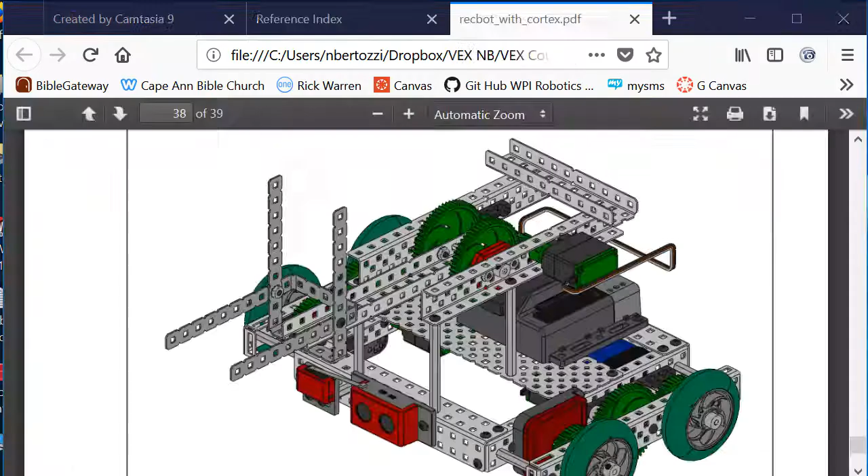If you have the thumb drive for the VEX course, as discussed in an earlier video, go to the index here, click on reference, then you have RecBot building instructions, and open that up.

Scroll down to just about the bottom there. You'll see a picture of the arm we're going to build, except it's not going to have these pieces at the end to hold something. So we'll build it without the motor or the encoder, but we'll build pretty much most of what you see there.

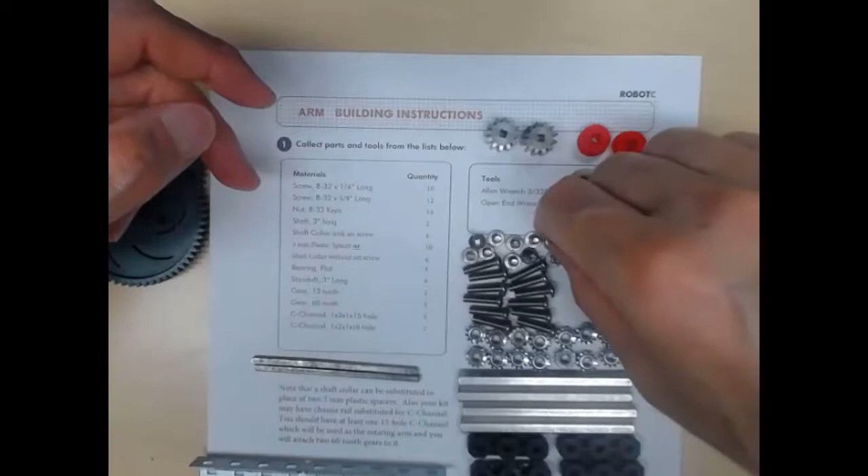The first thing you want to do is organize all your parts. You can see you have a materials list here. First is the 832 by 1/4 inch long screws. VEX pretty much uses the English system. 832: 8 is the size, which has to do with the diameter. 632 is a smaller screw, for instance. 32 means 32 threads per inch, and 1/4 inch is how long it is.

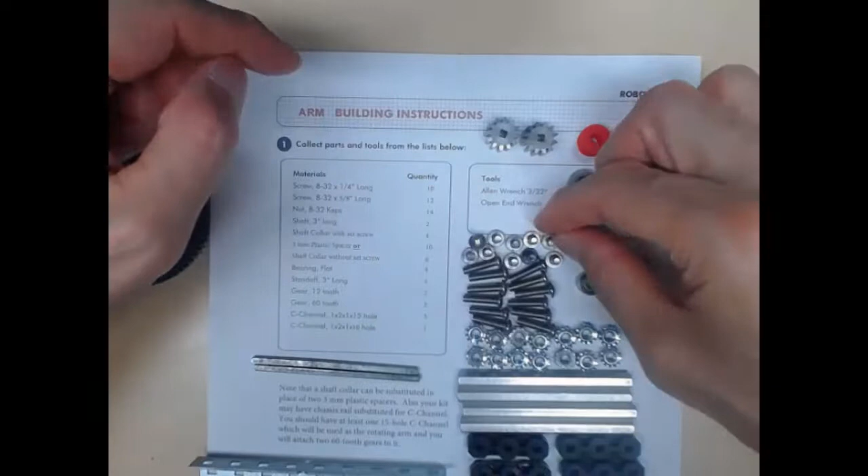You have 10 of these 832 by 1/4 inch long, and 12 of the 832 by 5/8 long. You have 14 of these nuts, and you put the nut on so that it goes up against the part, and this little star piece keeps the nut from loosening up.

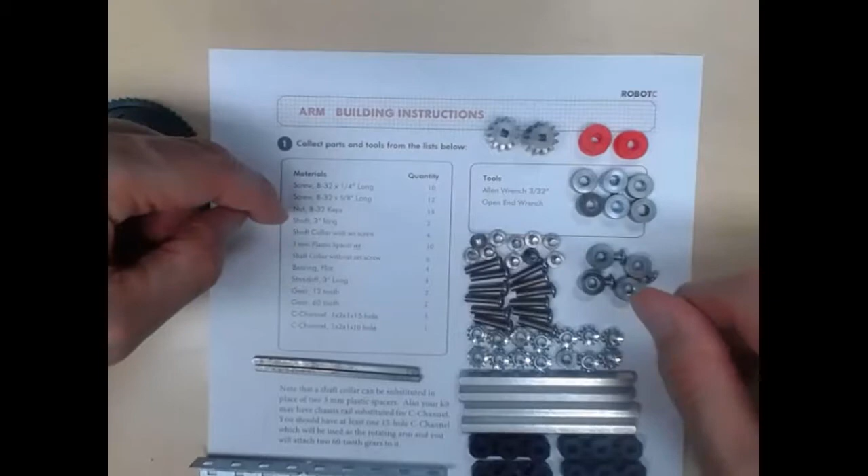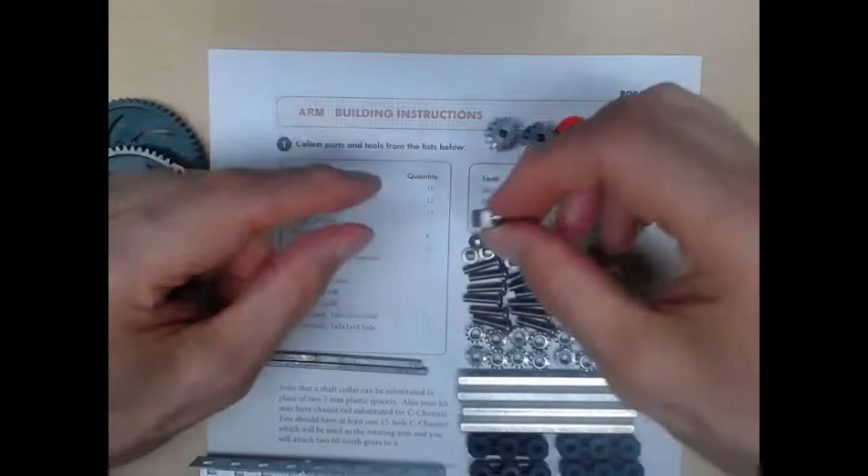You should have 2 3-inch long shafts and shaft collars with set screws. You should have 4 of those. You should have either 10 of these 3mm plastic 3D printed spacers, which are just about the same width as a collar, or you may have 6 shaft collars without set screws. Let's see, I think I had one.

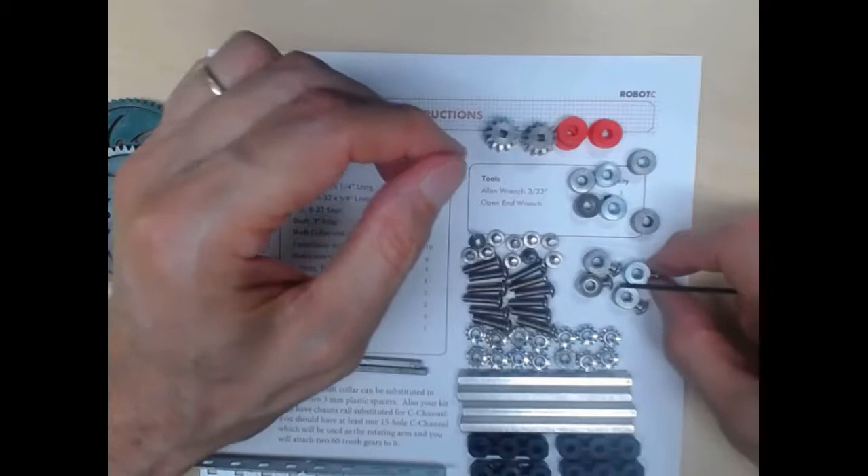This one still has the set screw in it - just a little screw - and you can tighten it up with an Allen wrench on the shaft, but it's very narrow so it doesn't interfere with anything. We gave you 4 of the collars with these 832 1/4 inch screws, just so the same size Allen wrench fits everything, since you'd otherwise need a smaller Allen wrench for the collars. Unfortunately, the head on this screw is wide enough that when we put it together, in one case it actually interferes with the bearing, so we probably should have given you just the ones with the set screws.

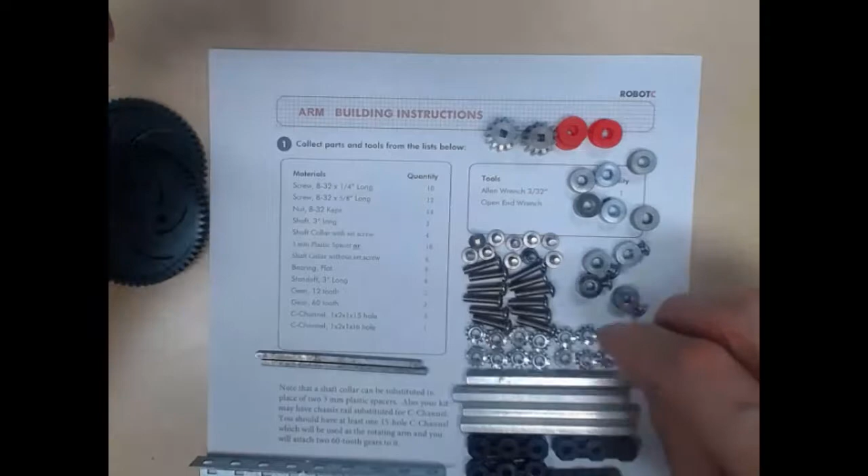So those are the collars, and then the bearings are these black ones with 3 holes in them - those are Delrin bearings. These are the standoffs, threaded at either end - those are 3-inch standoffs. You have 2 12-tooth gears, and 2 60-tooth gears.

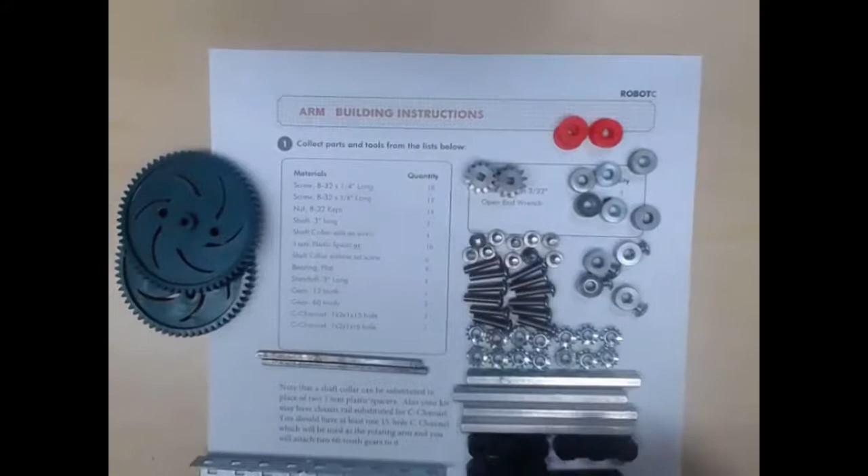For the C channel, you should have 3 pieces that VEX calls 1 by 2 by 1s, with 15 holes - you can count 1,2,3,4,5, plus 10, another 5 is 10, and 5 is 15. You should have 3 like that, and then one like this with 10 holes.

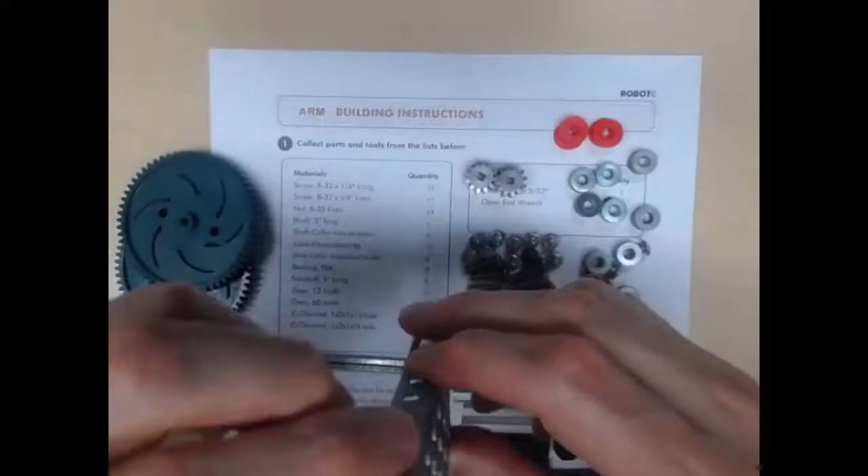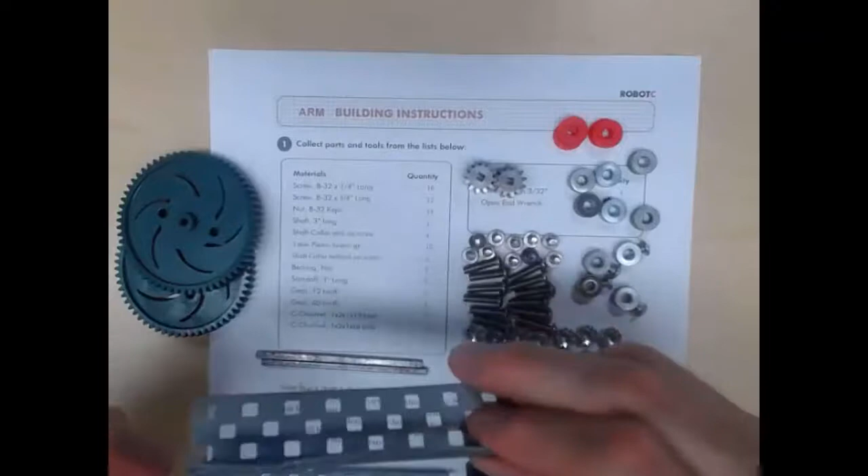Now you may have something that looks like this - an L shape. As indicated in the text, these are called chassis rails, so you can still use them. They're pretty much the same, except they don't have this end - they're missing a side. So to build this arm, we can use either C channel or these chassis rails.

Make sure that every team has at least one of these 15-hole C channels, because this is going to be the arm. We're going to mount a gear on either side of this, so make sure each team has at least one of these C channels.

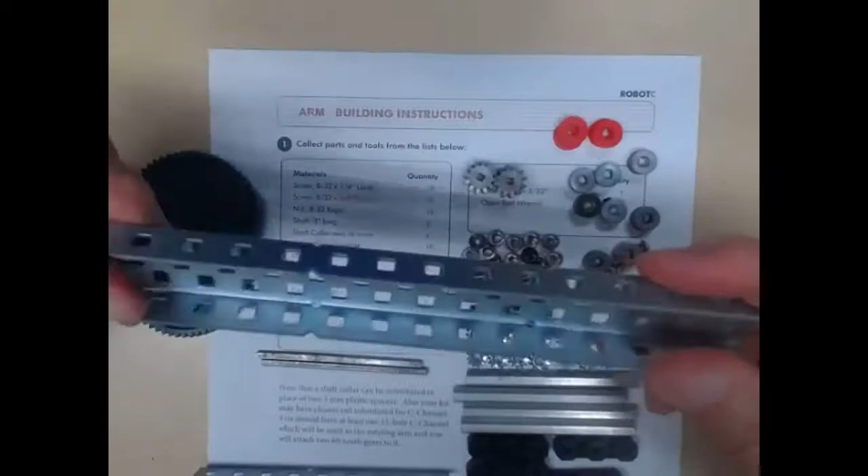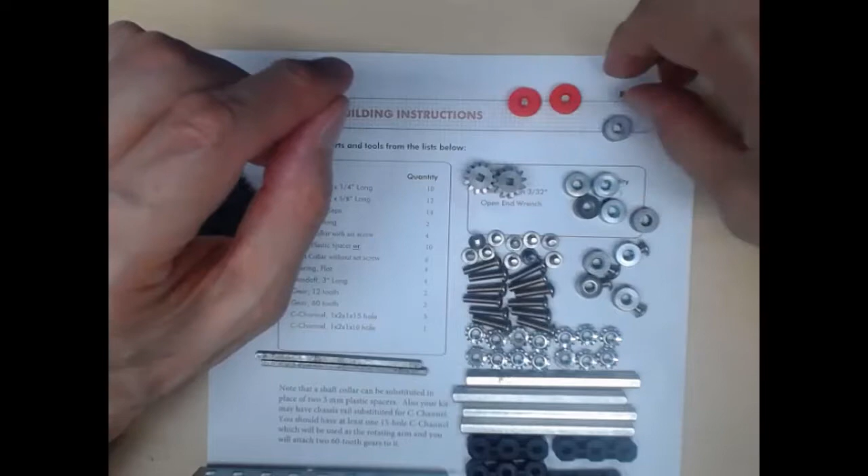Earlier I said the 3mm spacers were the same thickness as the collar - what I meant was that 2 of the 3mm 3D printed spacers is about the same as the collar. We wanted to send you enough spacers; normally you don't want to use a collar as a spacer, but since we're starting school, we didn't have enough spacers to send along.

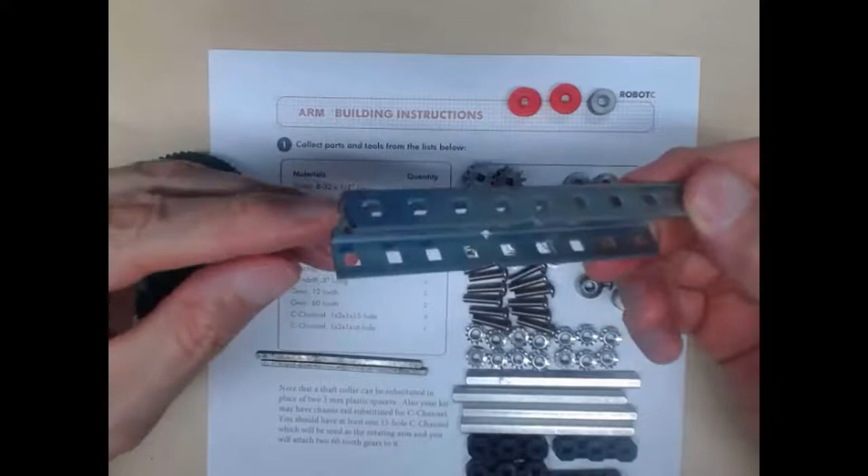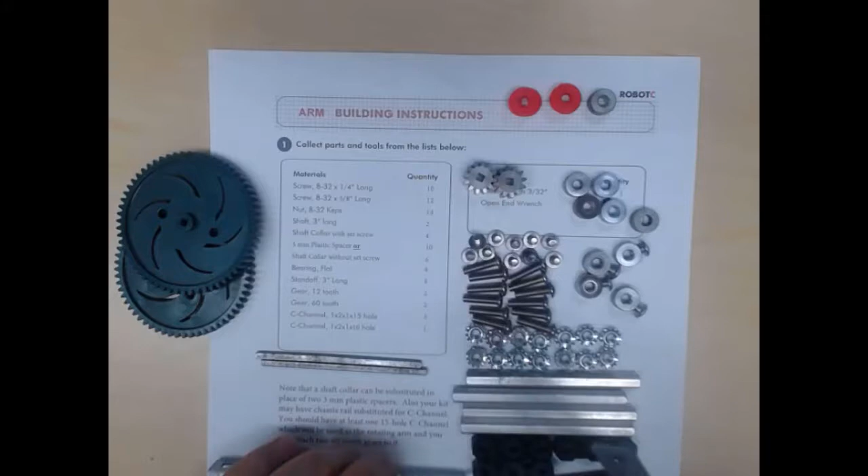Also, I said you want a 10-hole piece, but this piece I have right here actually has 9 on the side - it was cut, and that still will be okay, since it's the distance from here to here. I'll show you how to do that when we get to it. But anyway, if you have all your parts, the first thing we're going to do is build the arm. Let me just move some of this stuff out of the way.

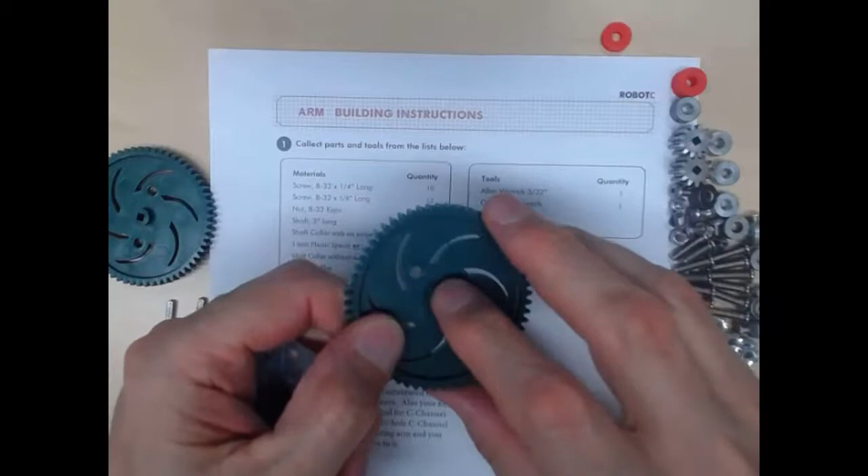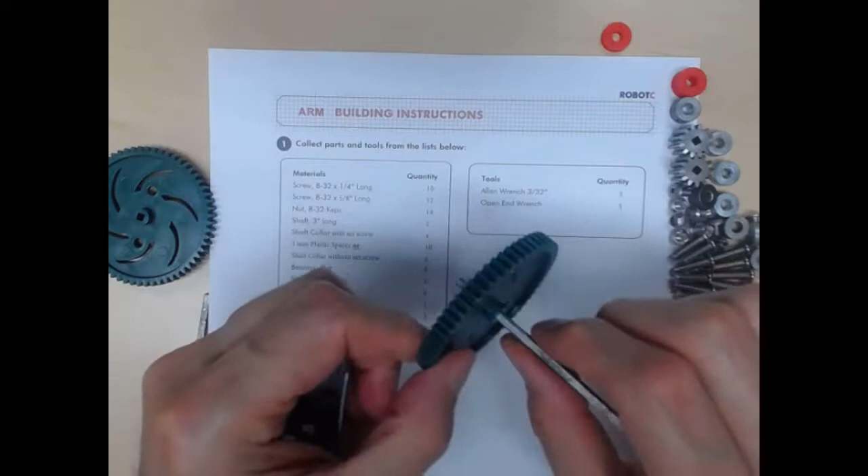Okay, so we're going to put a gear on either side, and you can see that if we were just to bolt this, there's 2 holes here. You want to put a bolt through this hole and into this end hole. But you can see that because of the width of the axle here, with a square, we want to be a little bit wider. The wider that is, then the force being exerted on the axle will be reduced, right?

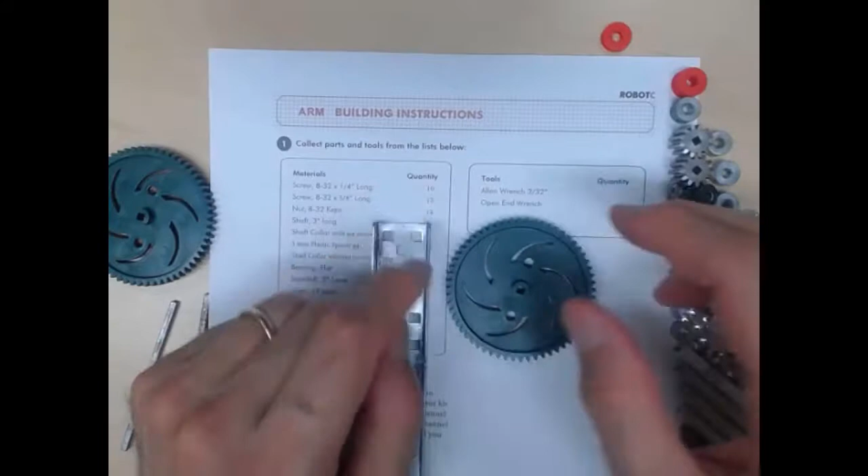So that's why what we want to do is put a bolt through that hole, and then take one of the collars without the set screws. It might be a little hard, you might have a little trouble pushing that on. Just push that on, and now you can see this is going to be offset, so that when we tighten it up, it's not going to push on the hub and warp the gear. So you can just go ahead and put that on there.

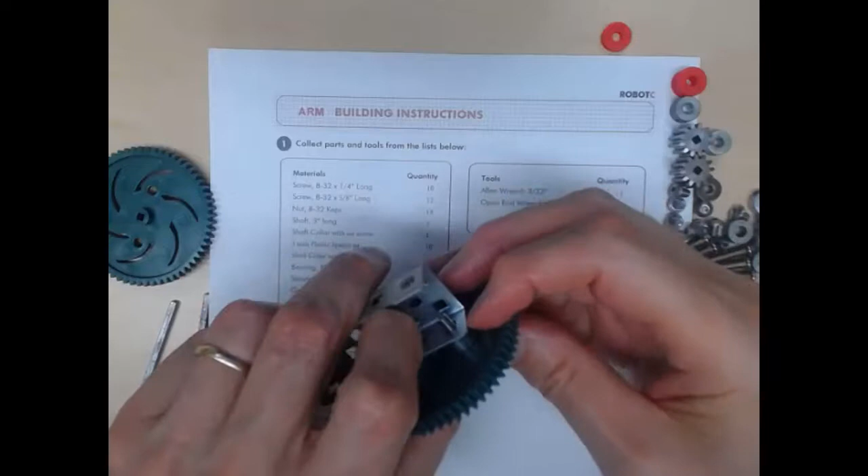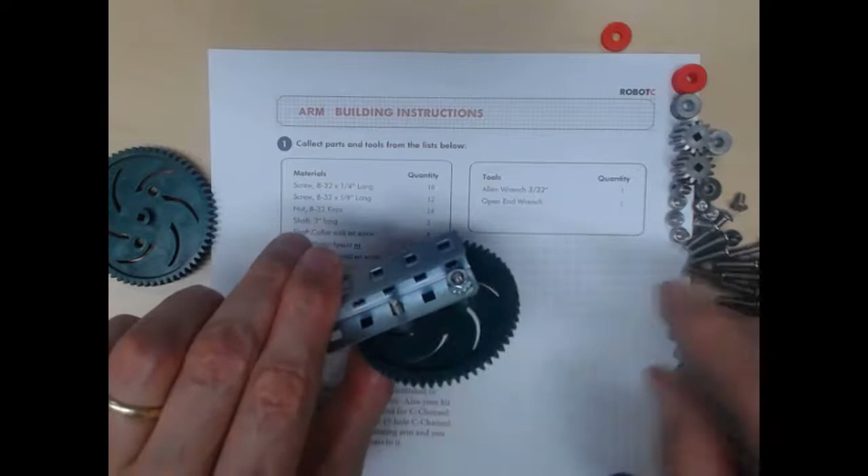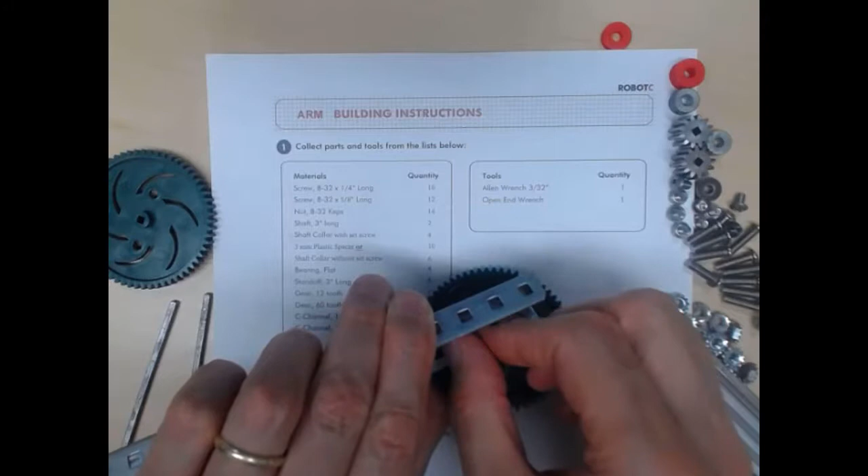Okay, and then you'll do the same thing on the other side. Take a collar without a set screw, and you can get this ready. Put that through, and then come through on that side. And don't tighten them up too much, just finger tight for now. And then you'll do exactly the same thing on the other side.

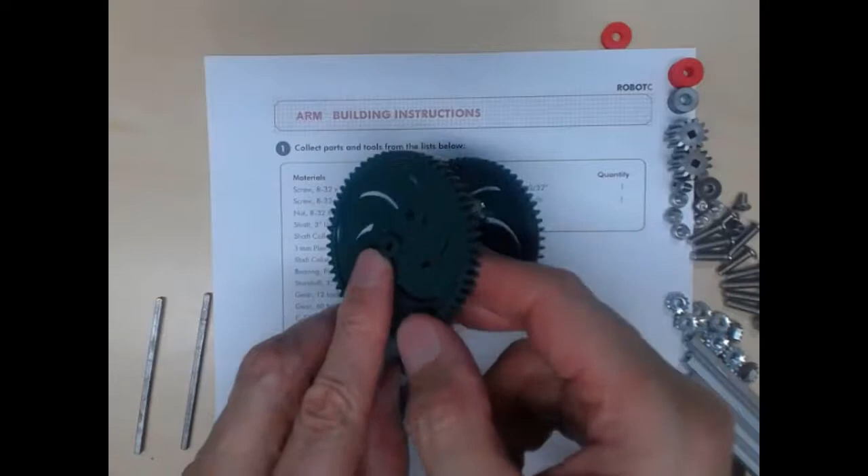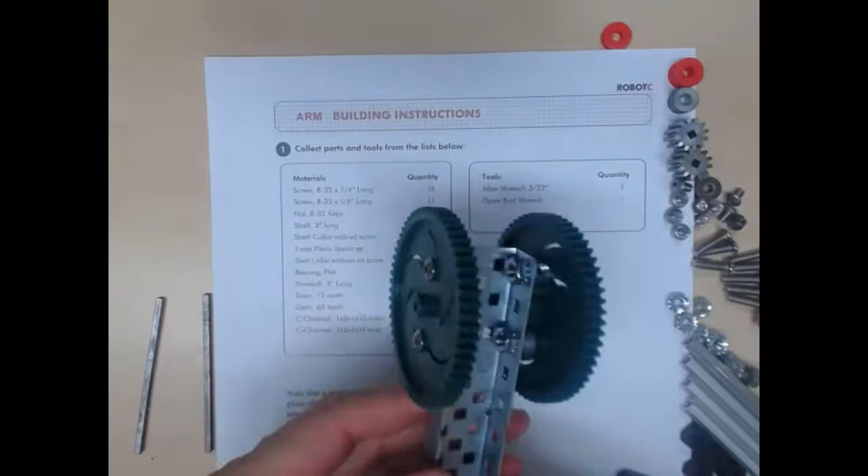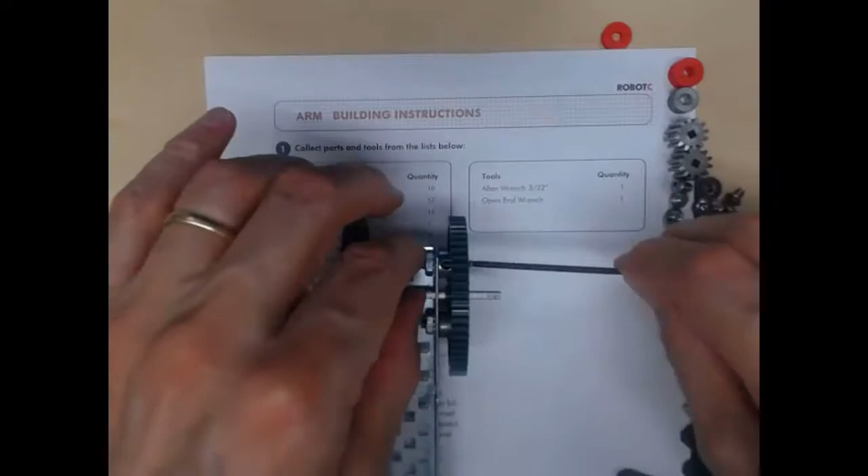Okay, and then just put a screw on the other side and a collar. And while that's loose, we're going to put the axle through. Since it's a little bit loose, you might have to just jiggle it a little bit and get the axle through so it's about the same distance through on both sides. And then you can take your Allen wrench and just snug up the 4 screws. You can just hold the nut with your finger and just snug that up a little bit, it doesn't have to be super tight.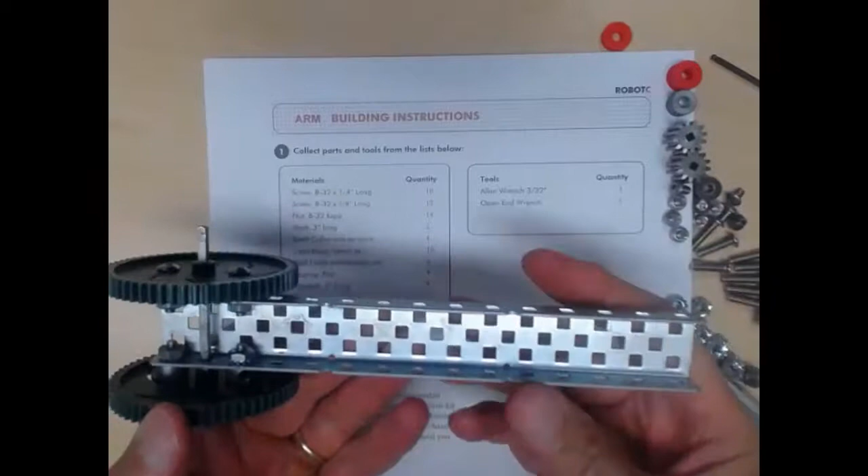So now you have the arm, okay, and you have 2 gears on spacers attached to the arm with an axle.

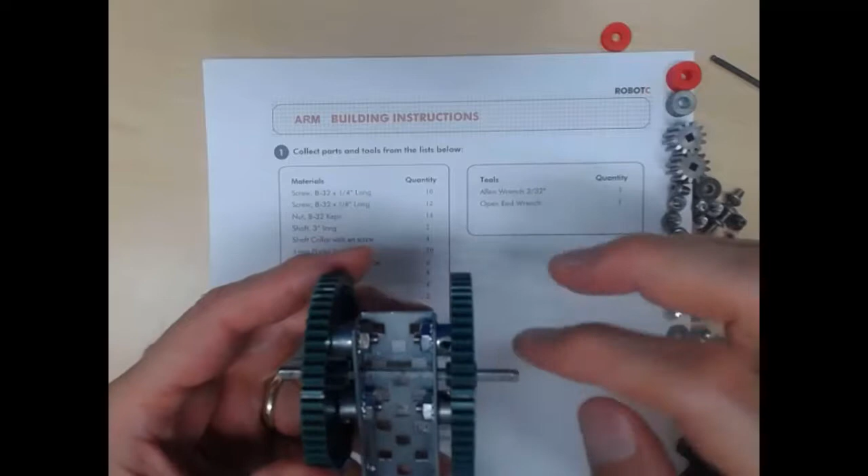All right, so we have the arm with the spacers, and I think earlier in the video I said that by having a wider hub, it reduced the force on the corners. It doesn't reduce the force - the force is spread out over a larger area, so it reduces the stress. So I just wanted to be clear that making the hub wider doesn't reduce the torque, but it does reduce the stress on the material.

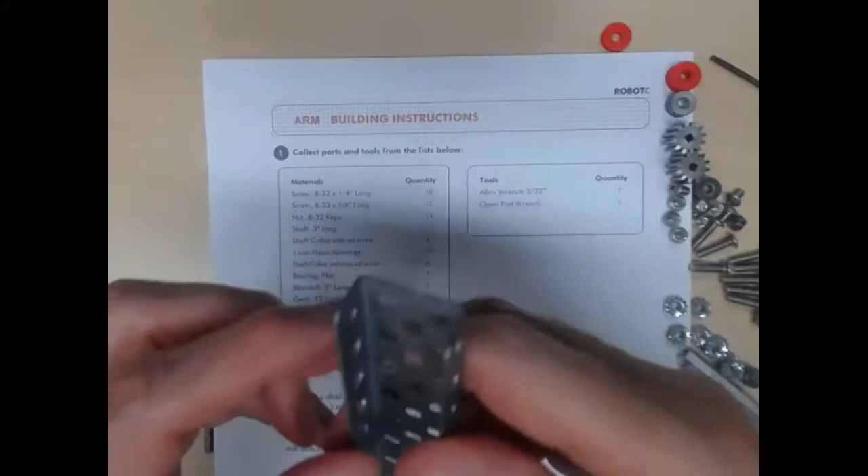So the next thing we want to do is prepare the side rails. So now you want to take, if you have another C channel, the 5-hole C channel, you can use that, or if you have an angle, you can use that. And what we're going to do is put one of the 1/4-inch screws through the end here, and just take one of the standoffs and just screw that on.

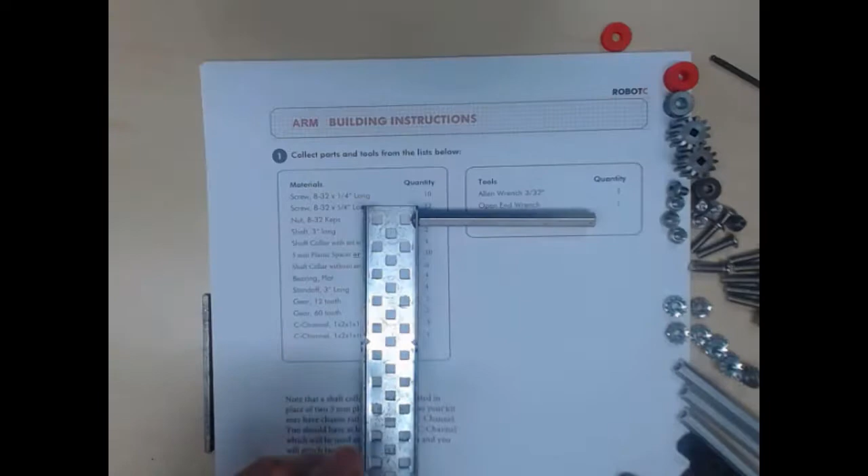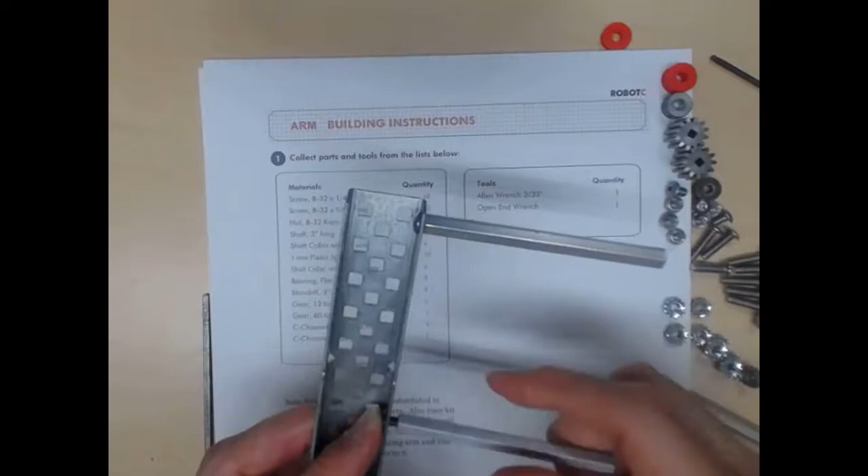Okay, and then we want to, if that's hole number 1, we want to go 1, 2, 3, 4, 5, 6, 7. So hole number 7, put a 1/4-inch screw in there, and put another standoff on that. So now there should be 5 holes - 1, 2, 3, 4, 5 holes in between, empty holes in between these two.

And then, if you had a piece like this, you would just do the same thing, except the side with a single row of holes, you just do it like that. So you won't have this lip on this side for the C channel, but it'll still work.

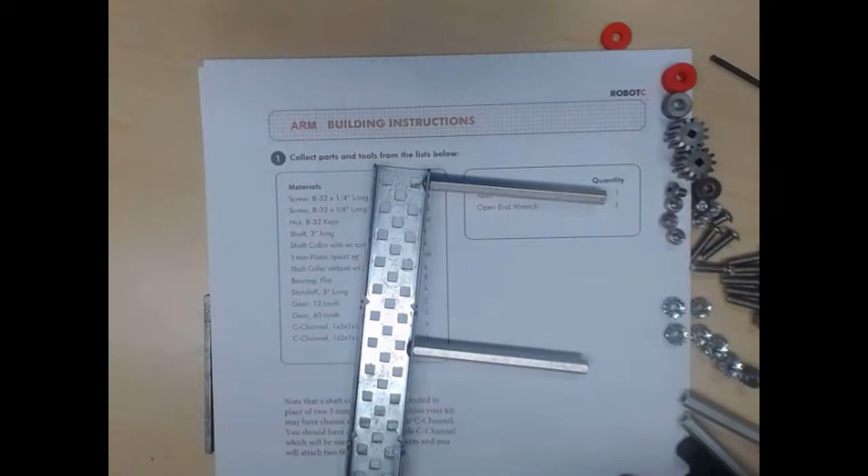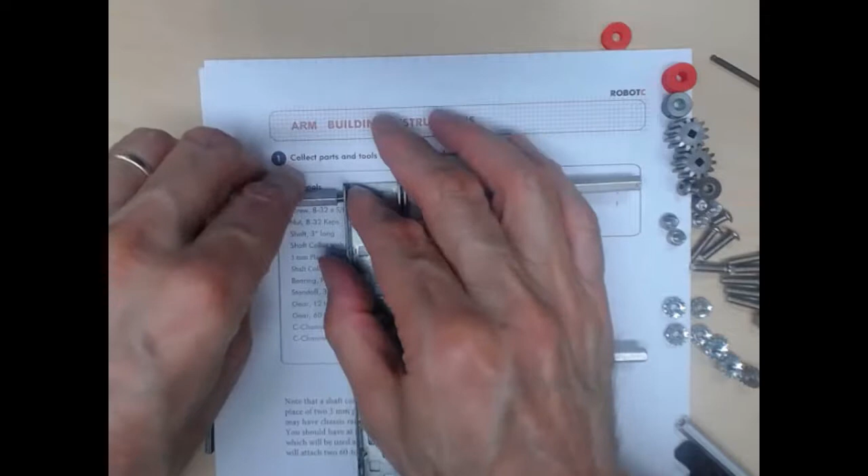Okay, and then you want to do the other side to be the mirror image. So we want the other side to be the mirror image. Put a screw there, and then put the standoff on here. And then same thing - again, you're going to have 1, 2, 3, 4, 5 empty holes.

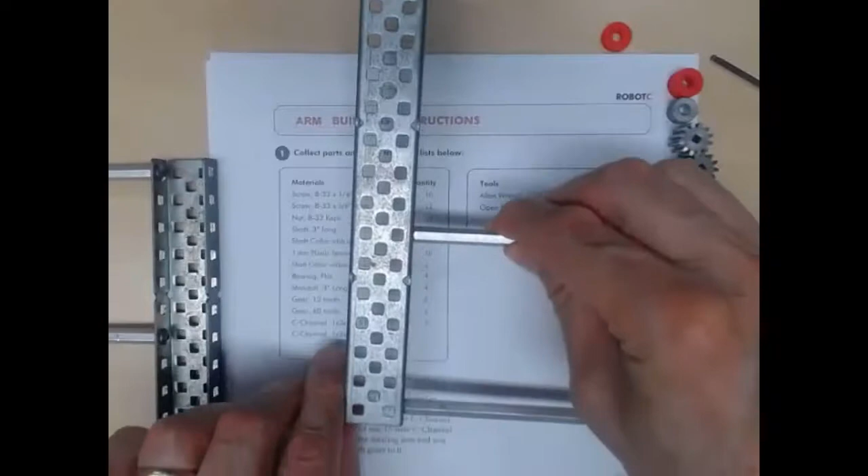All right, so now we have 2 pieces like that. The next thing we want to do is put the bearings on. So if I put this piece like this, then what you're going to want is 4 empty holes in the middle. So 1, 2, 3, 4, and then take your bearing, and that goes like that.

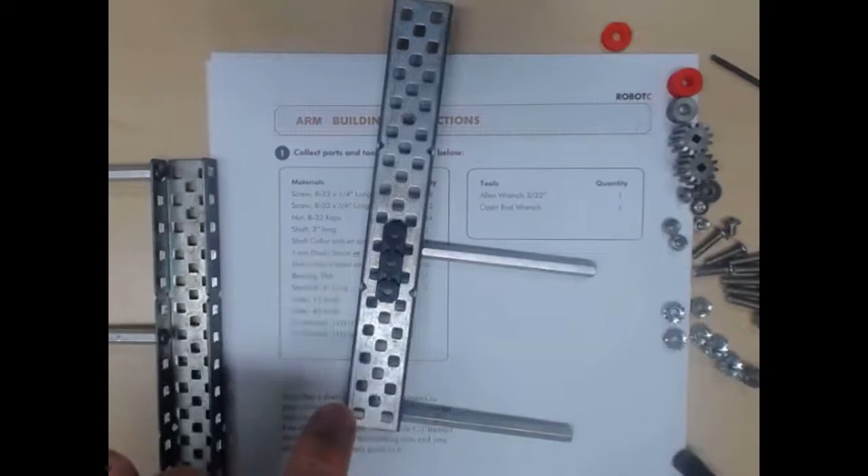So we have 4 empty holes, 1, 2, 3, 4, and then we'll put screws through on the 2 ends. We'll leave the middle hole empty, like that.

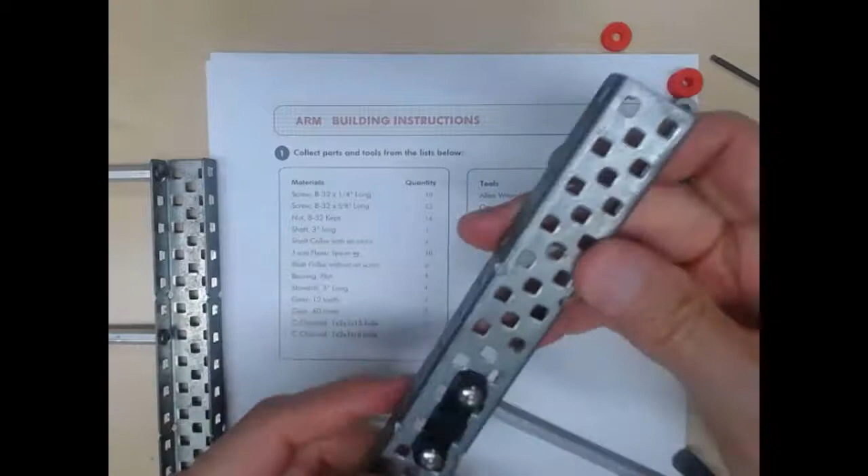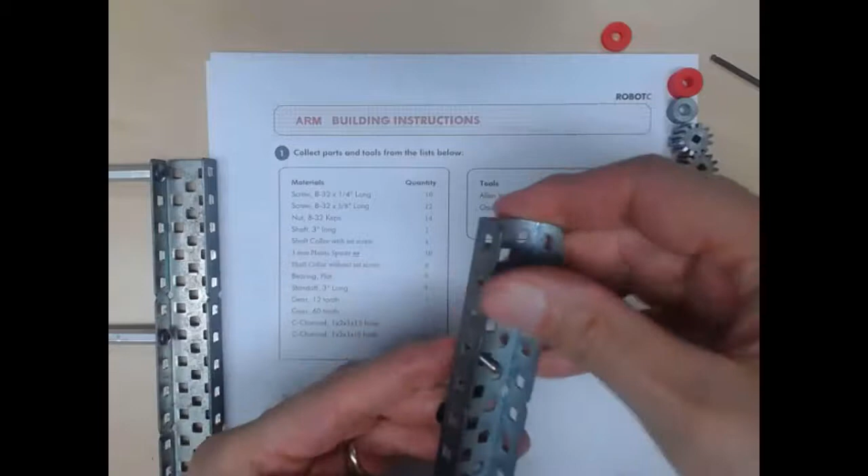And then leave 1 space and put the other bearing, but this time we're going to leave this end empty, and we'll put screws in the other 2 holes. So as I said, we'll put a screw in the middle one this time.

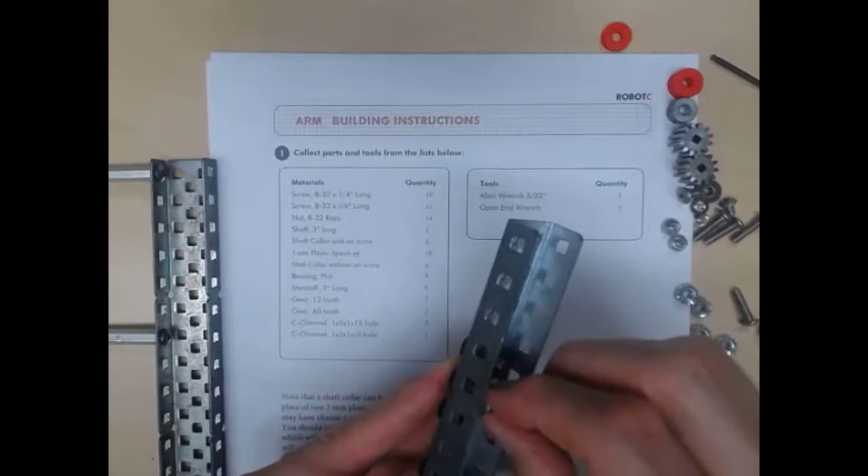Okay, and then you can just go ahead and snug those up a little bit.

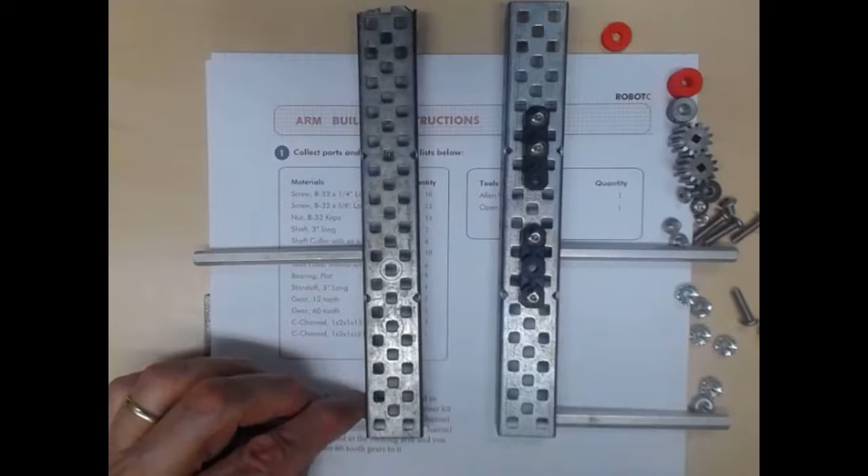All right, so now we have the mirror side here, and we're going to want to do the same thing. 1, 2, 3, 4 empty holes, and then put a bearing right there. In this first one, we put the bolts in the 2 end holes and leave the center hole empty.

Again, 1, 2, 3, 4 holes empty, and then take the other bearing, leave 1 hole space, and this time we'll put a bolt through the end. But the second screw we're going to put through the center hole, and leave this hole empty.

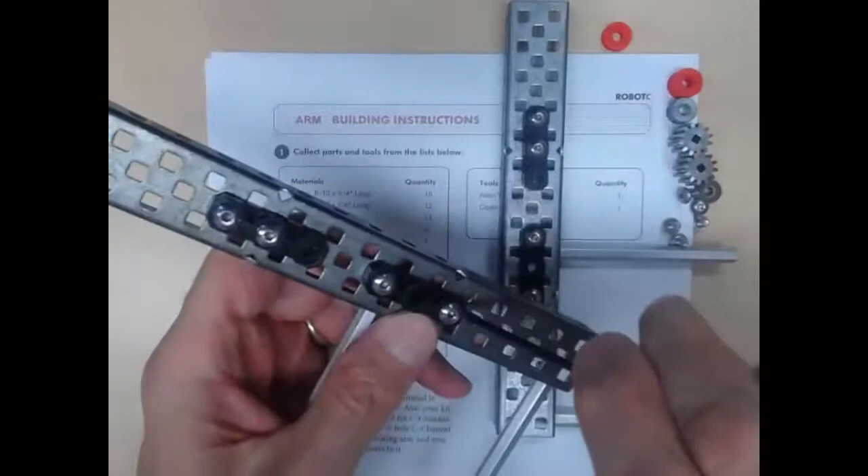And then we can just snug up those 4 holes, those 4 screws. Okay, so this is, you can see what we have at this point.

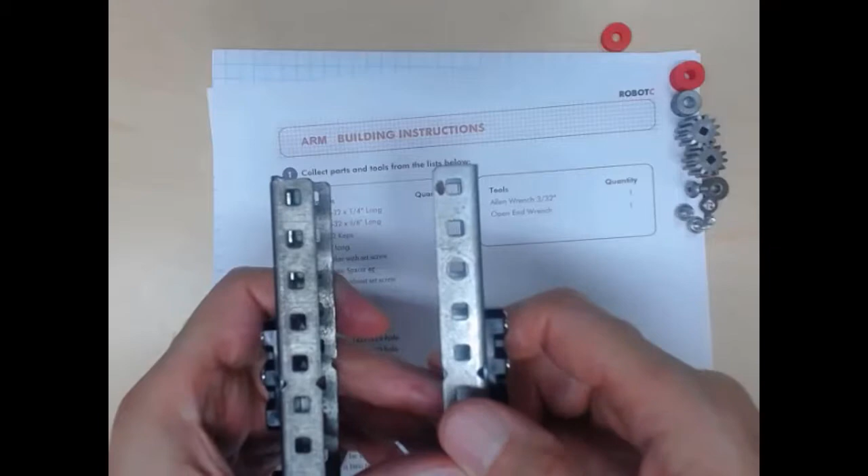All right, so we have the 2 side rails now, and when this mounts on the robot, this back section is actually going to be over your cortex, the microcontroller in the back. So if you have rails rather than these C channels, then you'll have to put your brace underneath, and the reason that's undesirable is because it's going to be closer to the cortex.

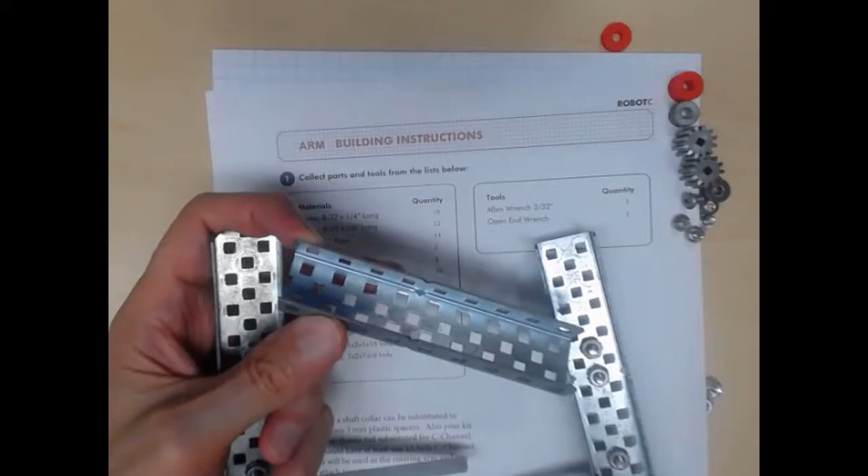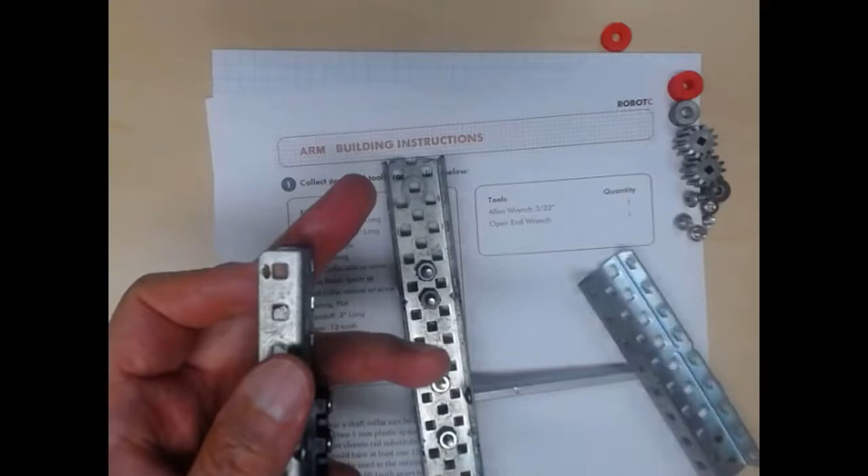But since we have C channels here on this example, we're going to put the rail on top. So the bearings actually face each other. In this hole out here, I'm going to put a screw that comes through this, and then put a nut on this.

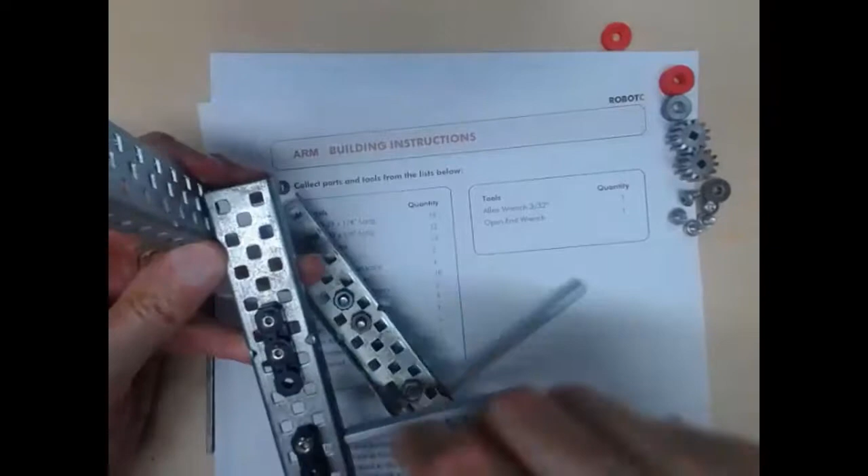And this time we want to have 6 holes. So depending on if you have, like mine was cut, and it's actually 9 holes, 8 holes across here. So you want to have 6 empty holes. Now notice that all the VEX parts, all these holes are 1/2 inch apart.

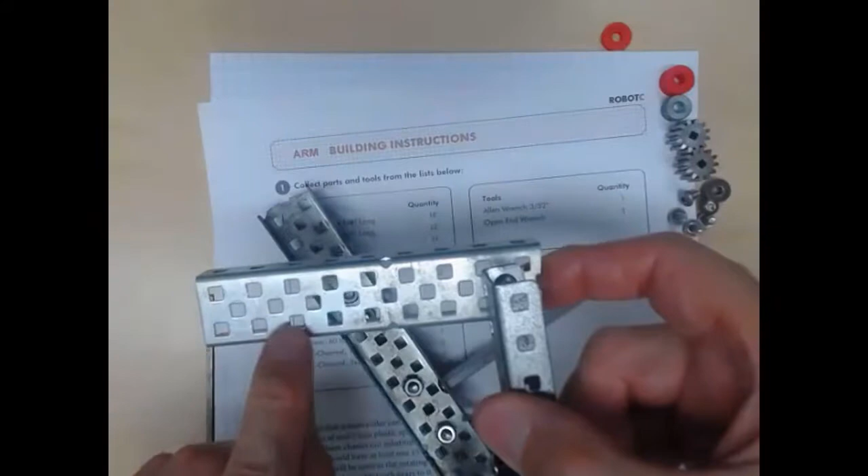And that makes it easy to select different gear ratios that will work into bolt things together. And this middle row is offset, so from here to here is a 1/2 inch, and from here to here this way is a 1/4 inch. So you have a row that's offset. Same thing on this one right here - they're a 1/2 inch apart, but then this middle row is offset a 1/4 inch.

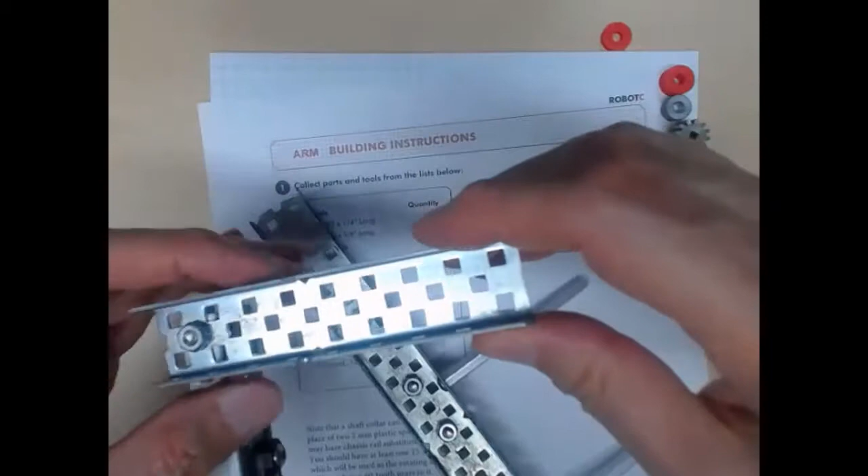So what we want is, again, you can see how I have this, I have the C channels down here. If you have a chassis rail, you're going to have to put this part on the bottom because you don't have the top to screw into. And then you want to have 6 empty holes, and put this together.

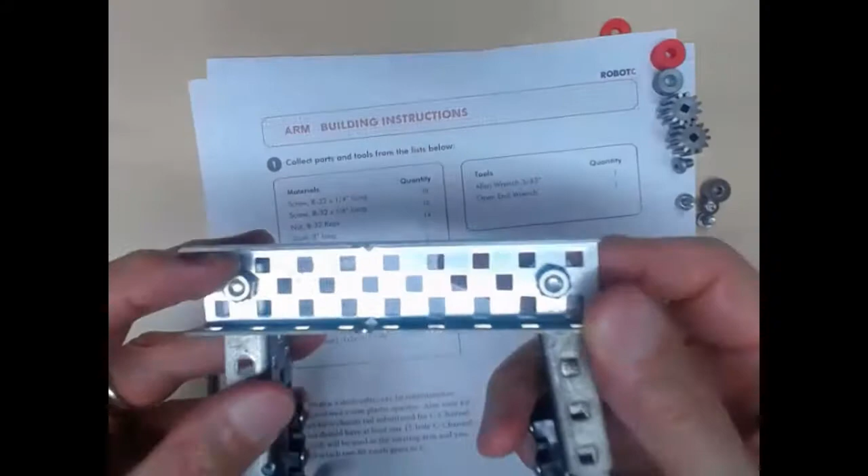All right, so you can see that I have 1, 2, 3, 4, 5, 6 empty holes. Okay, so we get that in.

So we're going to tighten that up a little bit more, and what you can do is you can come through the bottom hole with the Allen wrench so you can get at the head. And you want to tighten that up a little bit because you want these to be at 90 degrees to each other approximately. And just again, hold the nut with your finger and tighten this up a little bit.

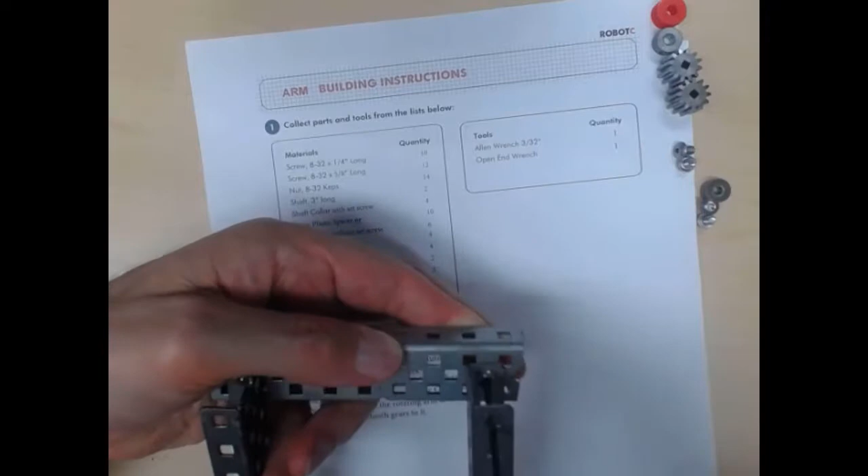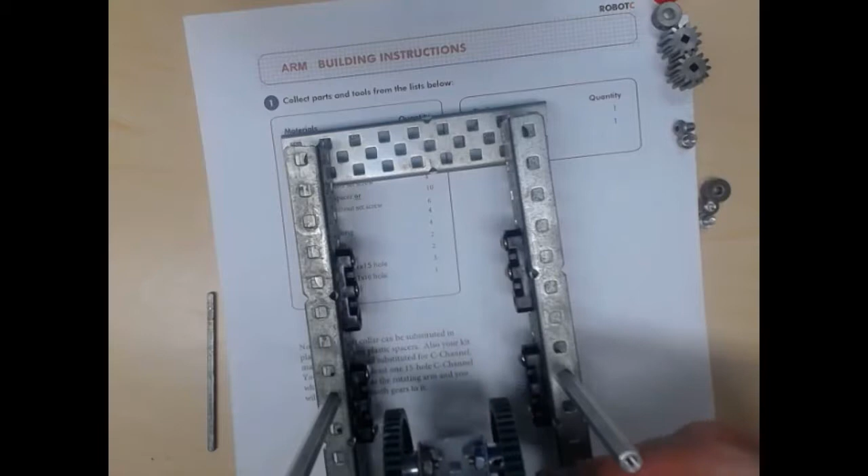Okay, so we have that like that. And now what we're going to do is take our arm, and I'm going to put this in with the C channel up. These things are facing up here, and put the two collars with the actual set screws.

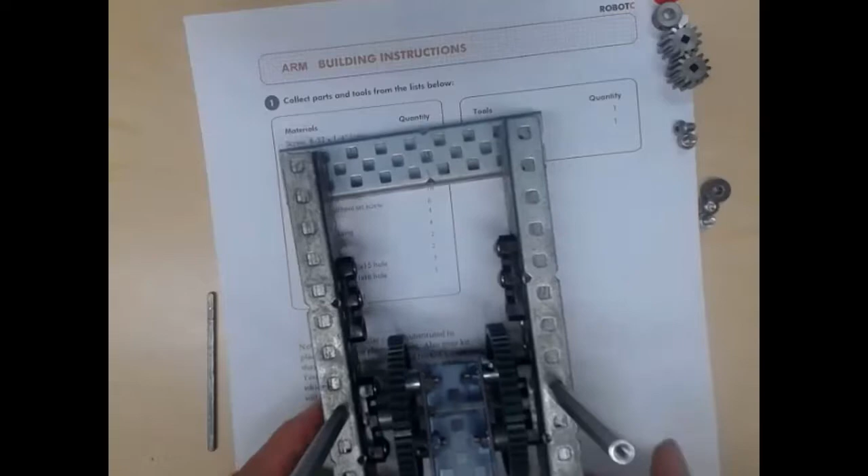But you can see this is what I was talking about before. I'm going to leave those set screws loose because the heads of the set screws would actually interfere, right? If I turn this over, whoops.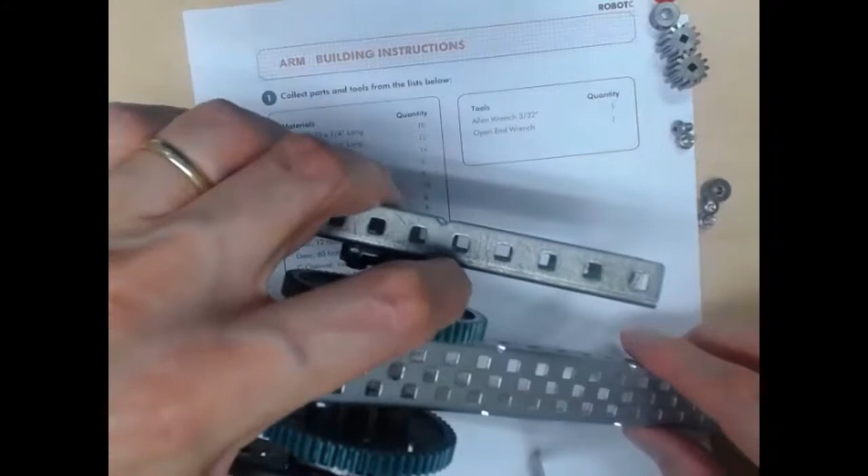Okay, so you can see that these set screw heads would actually hit the bearing. So I'll just leave them loose for now. But anyways, get this so that it's lined up square, and then just snug up your screws a little bit more, just to kind of hold that together. So we're almost done here.

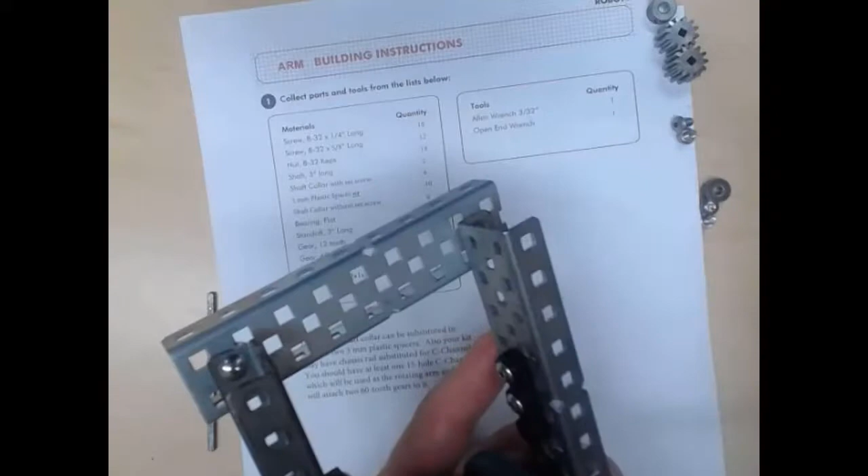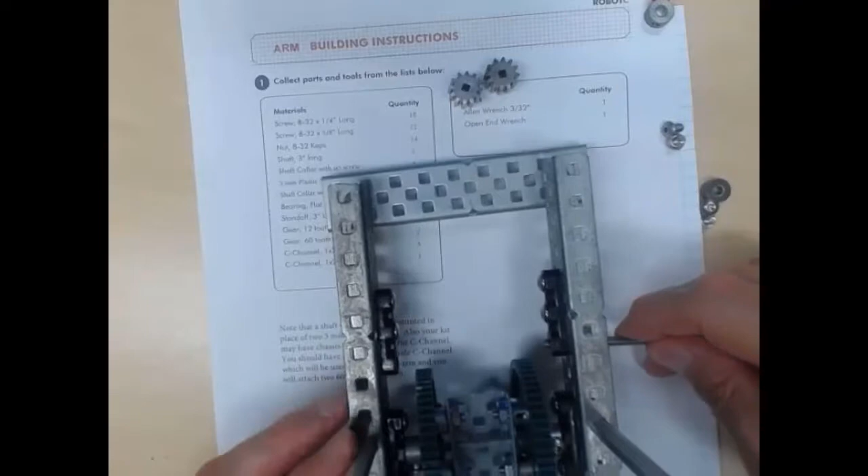Okay, so now the last step is we have our last axle, and we're going to run the axle through and then put a spacer. Well, actually, this one we want to have a spacer and then a gear.

Okay, and then we'll put a collar with a set screw through, and then a second collar with a set screw, and these are going to hold everything in place. Okay, and then we put another gear, and get the gears so the teeth match up there, and then we put our last collar for the spacer.

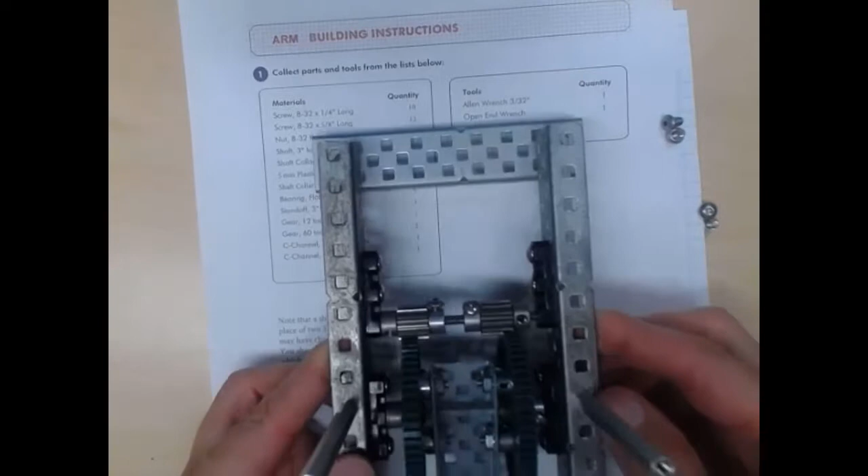And again, if you have the red spacers, you can be using the red spacers on the ends. So just get that through there, and then push that into place, make sure that you space these out a little bit and push the axle in place, just push it through so it's the same. It's just you should be able to feel the ends with your fingers there, just about there.

And now what you want to do is push these two collars, hold the axle in place and push these two collars out like this. So you can see how I held the axle in place and pushed those collars out. And now this collar is going to hold this gear up against this other spacer here. So just tighten that up against a flat section. And then this one is going to hold the other side.

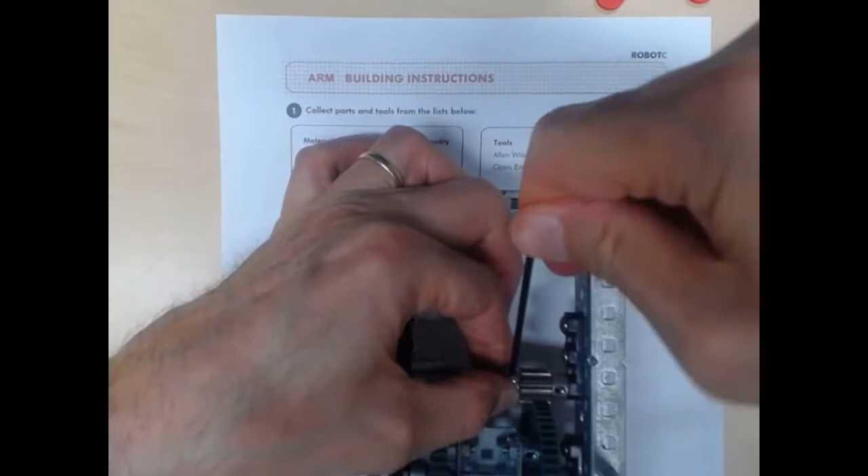Okay, so with these two collars locked in place, then that axle can't go anywhere. And so now you can see that this is working.

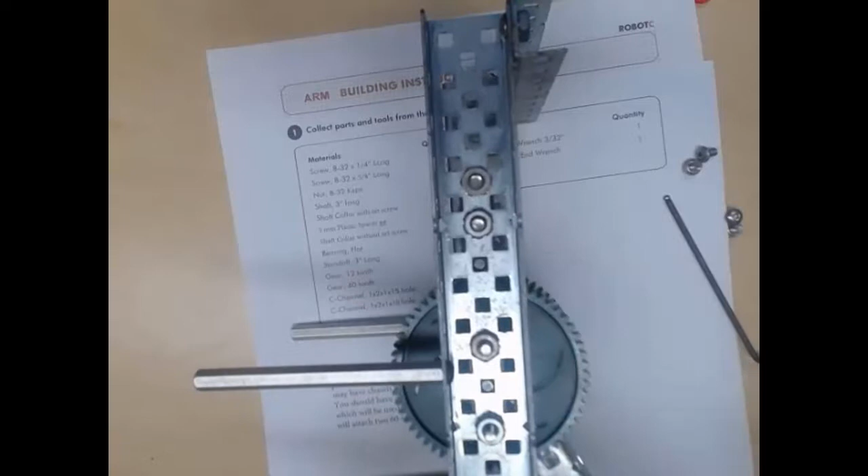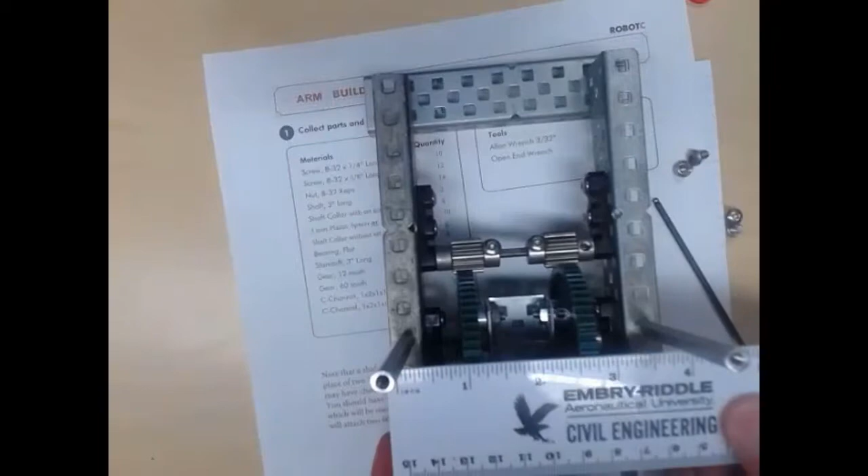And if you measure this, these holes are 3 inches apart, and across this direction they're 3.5. So you should be able to take this, if you look at the base bot, this should be able to fit on the base bot now. This section is going to be out over the microcontroller, and this section will be hanging off the end of the robot. And then you could add some kind of other metal here if you were going to carry a ball or something like that.

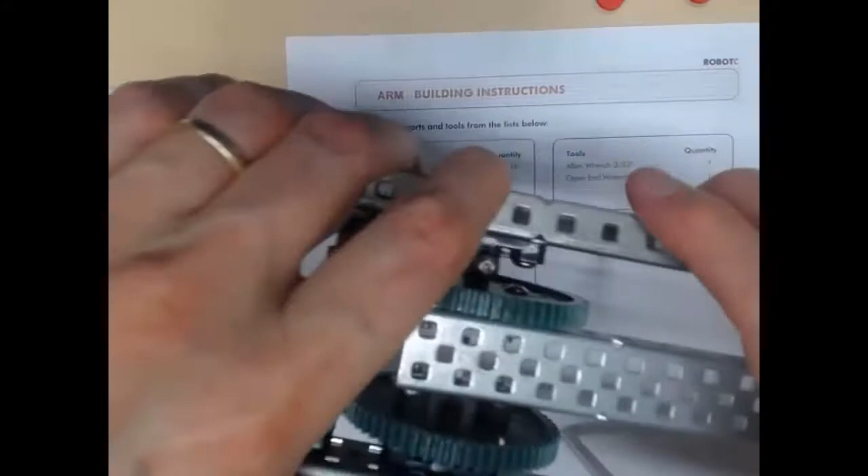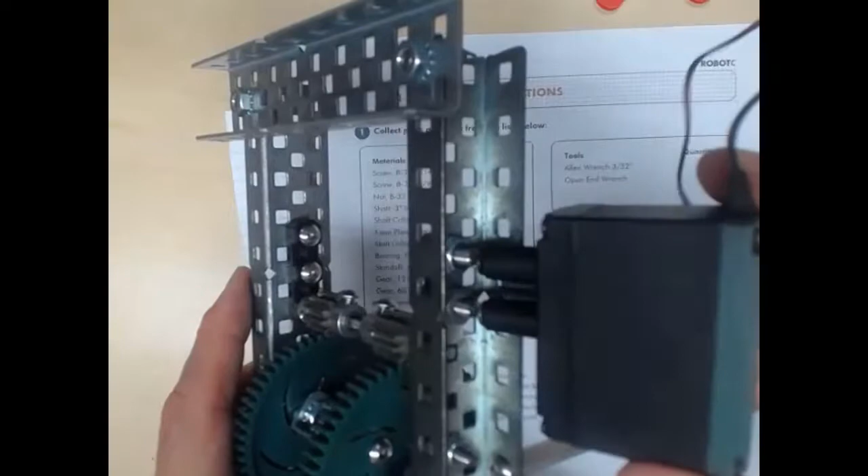And then if we had a motor, all we would have to do is use a longer axle right here, and you can see here's the motor, and then these screws, you would use motor screws, and those would go into here, and the axle would go right into this section right there.

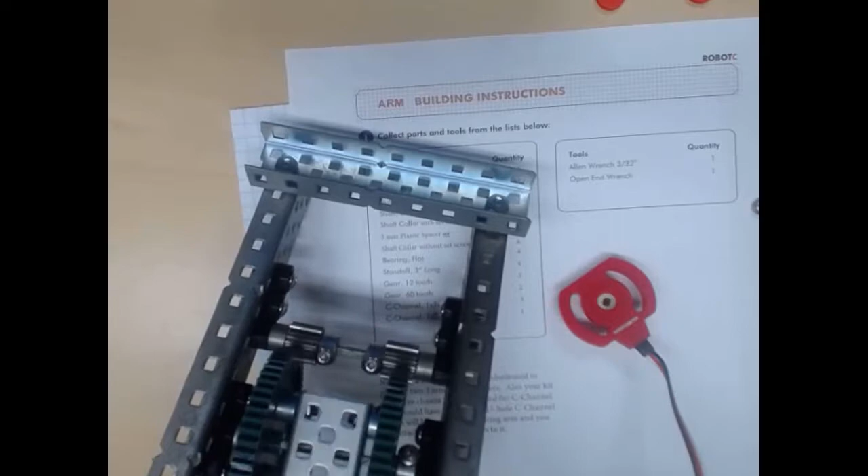And then if we had a potentiometer, on the VEX course the maximum you want to turn those is like around 210 degrees. So the small gear is going to turn a lot. In other words, if this arm moves 180 degrees, but you have a 5-to-1 ratio, the small gear is going to rotate 5 times that. So you can't put the potentiometer on the small gear, but if you had extended this axle right here, then you could mount this potentiometer right there and use that.

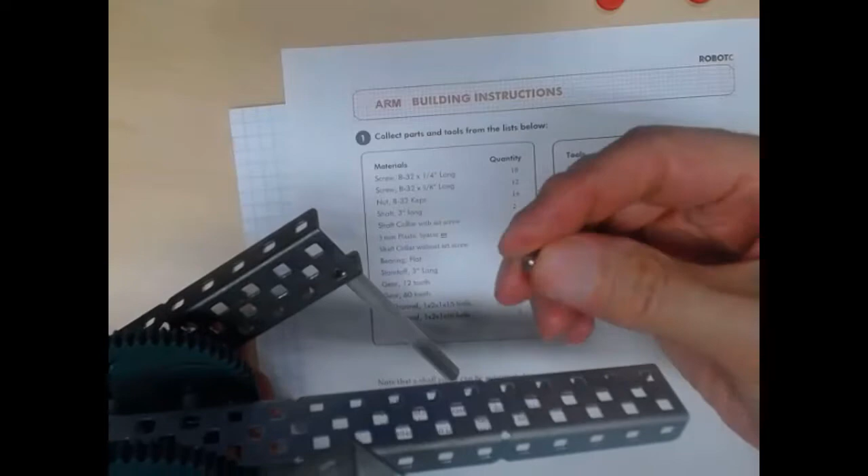And so anyways, this arm, you should have 4 screws left, the 4 quarter-inch screws, and you should be able to mount this on your base bot now.

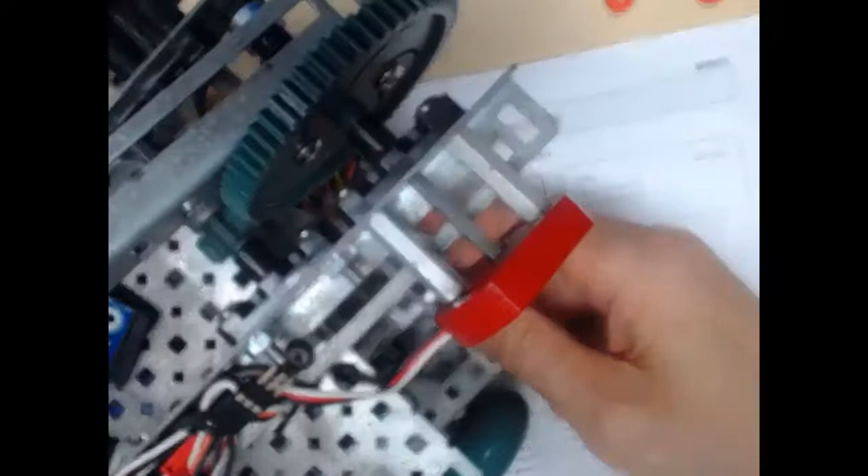And I just want to show you, here's a robot with a different kind of arm, but you can see here's the motor mounted to drive the small gear pinion, and then here's the potentiometer, that has the axle extended from the large gear because it doesn't turn more than like 180 degrees. So at any rate, that gives you a little bit of an idea of how to use VEX parts.

As I said, most of the stuff is in English. The holes are all offset a half inch. Different rows are offset by a quarter of an inch, but it makes it fairly easy to put things together. So I hope this is helpful, and hope you have a great day.